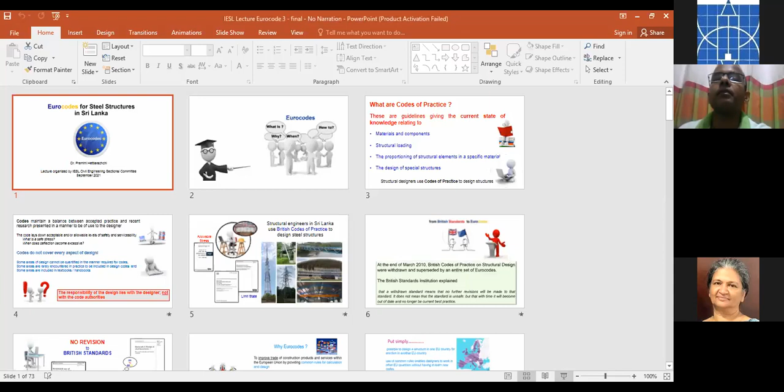So, Eurocodes for steel structures in Sri Lanka. During this presentation, I hope to answer questions that you might have relating to Eurocodes.

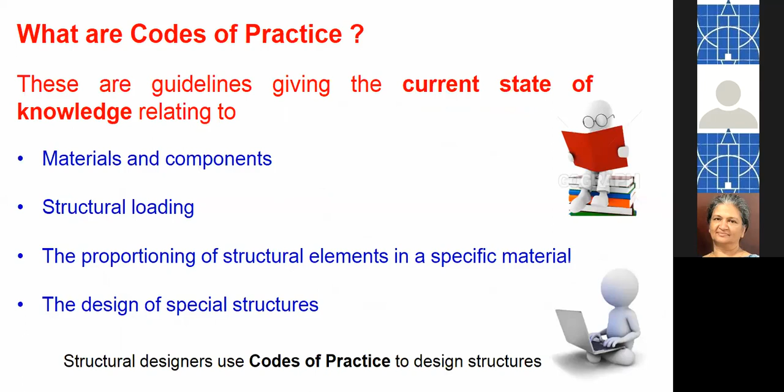Before we proceed, let's remind ourselves what codes of practice are meant to do. They are guidelines that give the current state of knowledge relating to materials and components, structural loading, the proportioning of structural elements in a specific material, and the design of special structures. Structural designers use codes of practice to design structures.

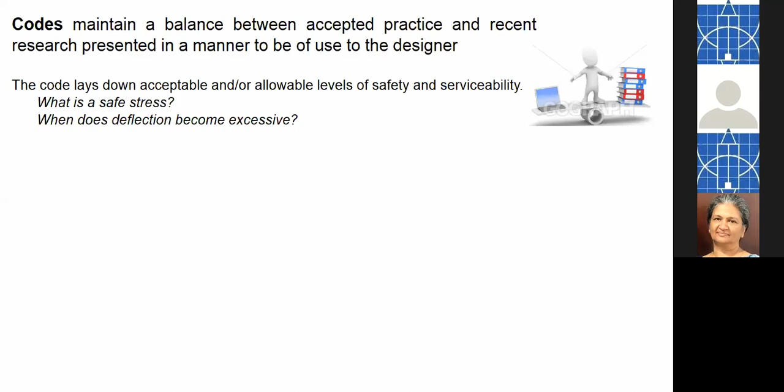Now, the codes maintain a balance between accepted practice and recent research. The code writers distill the recent research in a manner that can be of use to the designer. But codes don't cover every aspect of design. Some areas of design cannot be quantified in the manner required for codes. Some areas are rarely encountered in practice to be included in design codes, and some areas are included in textbooks and handbooks, so they don't include that in codes of practice. But the bottom line is that the responsibility of the design lies with the designer and not with the code authorities.

So structural engineers in Sri Lanka use British codes of practice, or have been using British codes of practice over the years, to design steel structures. I remember when I was a student, we were taught BS 449, which was based on the allowable stress method. And when I began my teaching career, the limit state design codes had made their appearance in the world, and BS 5950 was introduced to this country. We have continued to use BS 5950 with a couple of revisions to the code.

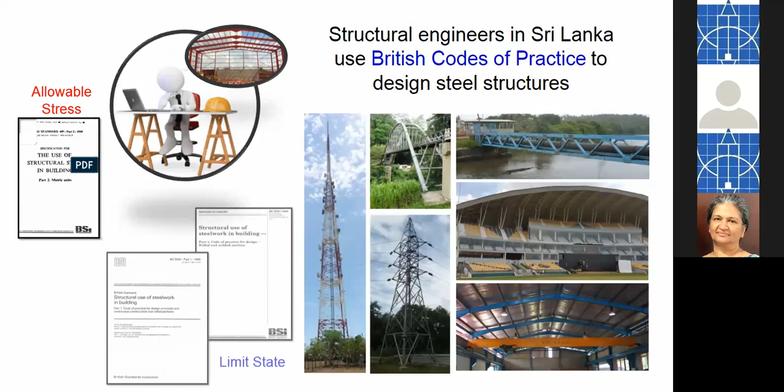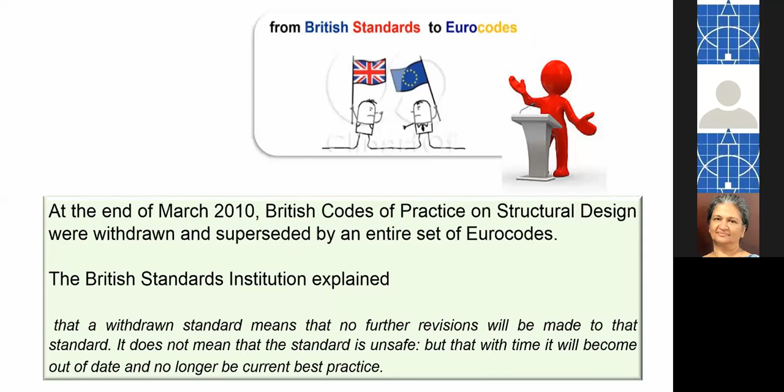So BS codes have now moved to Eurocodes. Let's see why, or what happened there. At the end of March 2010, British codes of practice were withdrawn and superseded by an entire set of Eurocodes, and no further revisions will be made to that standard. It doesn't mean that the standard is not safe, but it means that with time, it will become out of date and no longer be current best practice.

So there are no further revisions to British standards. Instead, what they have done is adopt the Eurocode and move from a BS to what is called a BS-EN, EN standing for Euro Norm. So what you have is BS-EN 1993, which is the steel code. Why Eurocodes? It's to improve trade of construction products and services within the European Union by providing common rules for calculation and design.

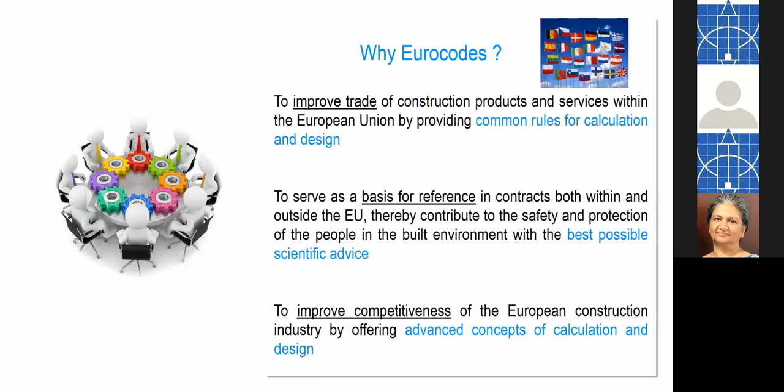It also serves as a basis for reference, giving the best possible scientific advice, and it improves competitiveness of the European construction industry by offering advanced concepts of calculation and design. Put simply, it's possible to design a structure in one EU country for erection in another country. The use of common rules enables designers to work in other European countries without having to learn new codes. That's a big advantage. And the most important advantage is that all research carried out in the European Union countries can be combined into one set of design requirements. So in a nutshell, it's a common basis for technical and scientific collaboration.

So what is in it for us here in Sri Lanka? I believe it's a complete set of up-to-date design standards that include the main construction materials, fields of structural engineering, and a wide range of structures, while at the same time retaining the flexibility of meeting local needs.

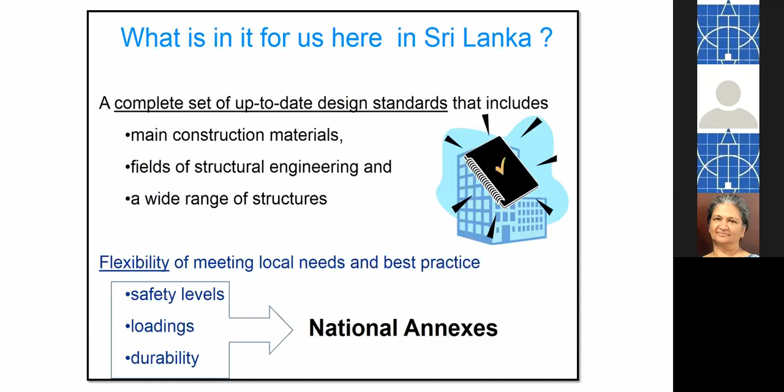And best practices with regard to levels of safety, loading, and durability in the form of national annexes. So what does a national annex include? Firstly, the nationally determined parameters, also referred to as NDP, that can be adopted in the relevant country. There are certain parameters that Eurocode says you decide for yourself what you want to use in your country. Secondly, guidance on the use of informative annexes - there are annexes to the Eurocode, and guidance in your national annex tells you how to use it. And there's also reference to complementary or supplementary information, of a non-contradictory nature, that can help the designer apply the Eurocodes. So these three aspects are included in the country's national annex.

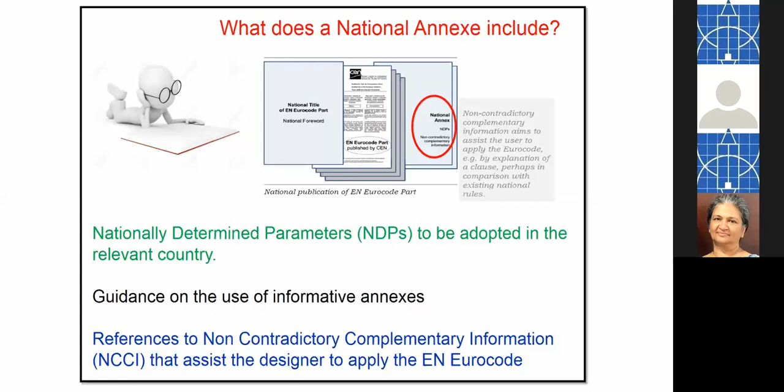Now, what is the implication of the withdrawal of the BS codes for structural designers in this country? Do we develop our own suite of Sri Lankan national codes, or do we adopt the Eurocodes? Developing a national code requires a great deal of time, effort, and resources, which we can ill afford as a developing nation. So very prudently, very wisely, the Sri Lanka Standards Institution decided to adopt the Eurocodes, and they have drawn up the relevant national annexes. In particular, I am aware that the steel structures national annex is ready.

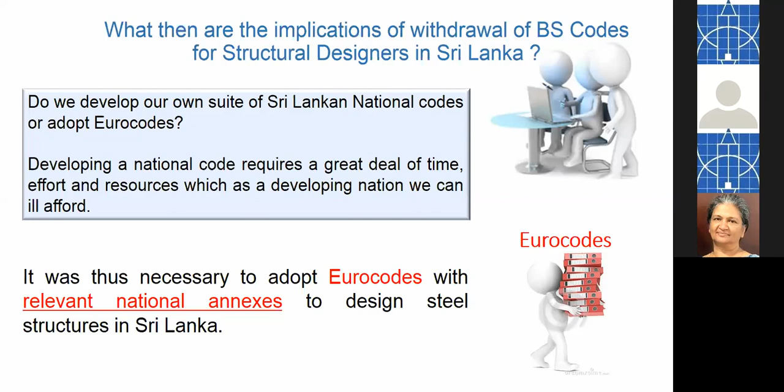National annexes have been prepared. Training has been provided - we have run short courses, but for the past 5 years or so we are training our undergraduates at Moratuwa. Moratuwa followed the other universities, Peradeniya and Ruhuna, which started before us. So undergraduates are now learning the Eurocodes, not the BS codes. Even the postgrads are being taught the steel Eurocode. There's computer software available, and plenty of guidance in the form of textbooks and specialized publications.

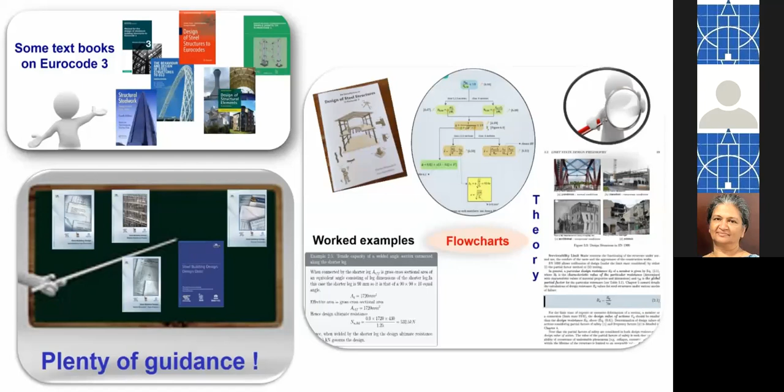I'm taking this opportunity to also refer to a textbook that I have written jointly with Isuru Nanayakkara, which gives the background, the theory, worked examples, and some helpful flow charts. It's an inexpensive, introductory level text for anybody interested in learning further details of the Eurocodes. Obviously, I'm not going to be able to explain the use of Eurocodes for steel during this short period, but there is plenty of guidance available, even on websites.

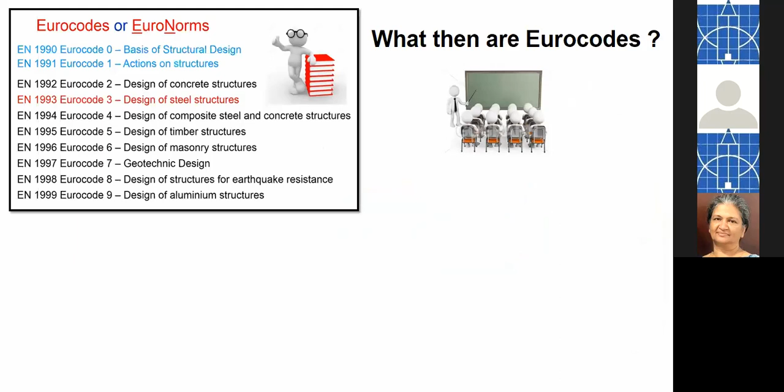So what then are Eurocodes? Eurocodes are a suite of 10 main documents. There are 2 documents that deal with basis of design and actions, and then there are 6 that are material related. And also there's 2 more - the geotechnical design code, which is Eurocode 7, and the one that deals with earthquakes or seismic actions. So you can see the link between the Eurocodes.

Now, EN 1990, which is the basis of structural design, first published in 2002, is a world's first because it's a material independent design code. Up to that point, all design codes were related to some material or another. But here is a code which has been written with no particular material. It's a core document that gives the principles and requirements that relate to safety, serviceability, durability, and robustness for designing buildings, bridges, and towers.

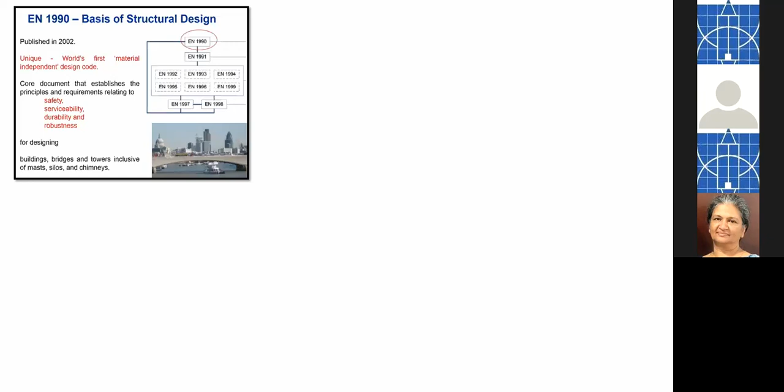When you say towers, it includes masts, silos, chimneys, so whatever. Now, the basic requirements have what they call principle rules and application rules. In the case of principle rules, you have to stick to those rules, you can't make any changes. But in the case of application rules, you can use some other method as long as you can justify that the requirement is met.

Take, for example, potential damage shall be avoided or limited by appropriate choice of one or more of the following. One of the items says, select a structural form and design that can survive adequately the accidental removal of an individual member or limited part of the structure, or the occurrence of acceptable localized damage. And that's exactly what happened.

On the right, there is this little picture, photograph of Charles de Gaulle Airport in France, where part of the terminal building collapsed. But the damage was limited or confined to this restricted length of building, and that was since repaired, obviously, and the terminal building could be used without further delay. So that is an example of where the structural form was able to cope with this damage, which was contained within a particular location.

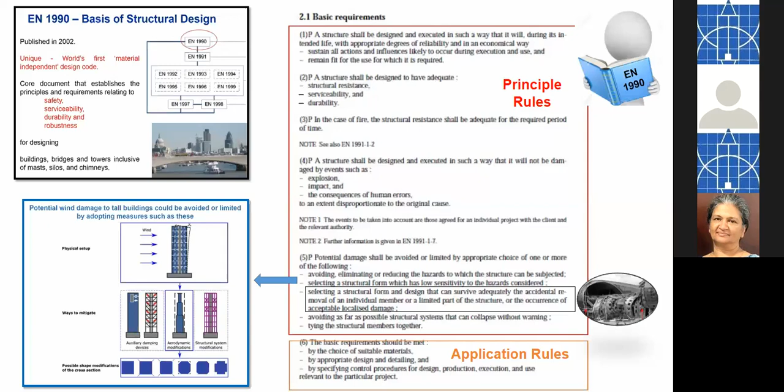Then we say here, avoiding, eliminating, or reducing the hazards to which the structure can be subjected by selecting a structural form which has low sensitivity to the hazard considered. And if you take that of wind and you have tall buildings, you as structural engineers in the audience would know that there are ways that you can mitigate the effect of this wind on tall buildings.

Then this code, this EN 1990, the code document, gives you the categories of design working life, and they give you different examples. So monumental structures, iconic structures is about 100 years.

Now this is something as an example of a nationally determined parameter. So we in Sri Lanka can decide to change this if we wish to, right? In the UK, they have done this. The 100 years has been extended to 120 years in the case of monumental structures.

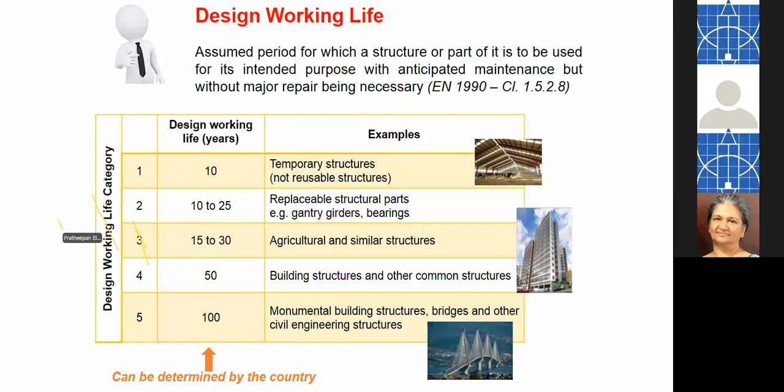The ultimate limit state and the serviceability limit state are the same limit states. Eurocode sticks with the same limit states. Now, some of the terms they use are different.

So they don't refer to loads, they call them actions. So you don't have dead loads, but you have permanent actions. Then all of your imposed loads, wind loads, snow loads, they are referred to as variable actions. They can vary over time, space, whatever. And then they have accidental actions. So variable actions can be subdivided into imposed actions, those due to people, furniture, storage, and there is the wind and the snow. So these are the actions on the structure.

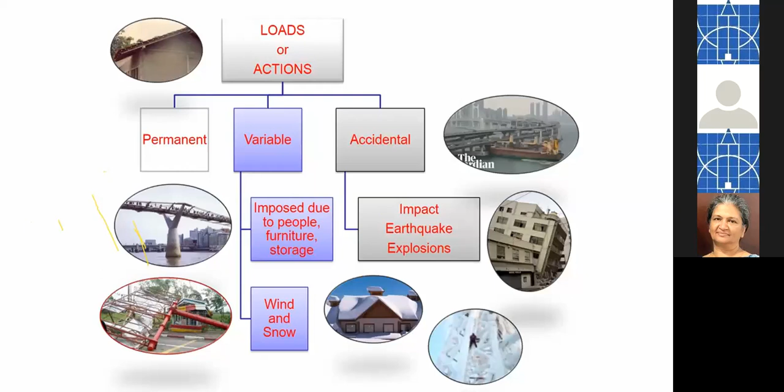The philosophy of structural design obviously remains the same, and it means that the design action, which is the characteristic action enhanced by a factor of safety, has to be less than the design resistance, which is the characteristic resistance divided by a partial safety factor, that for materials. So the concept or the principles of structural design are the same. But only thing is these numbers, these gamma F and gamma M and so on, are now a little different from what we perhaps have been or what we are familiar with.

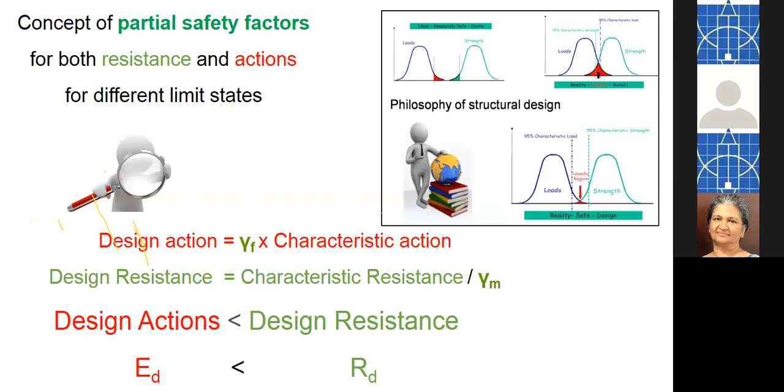So firstly, how do we combine actions? So you have your permanent action, as the name suggests, it's permanent, and you combine that with variable actions. The photograph that I have shown you is the Gateshead Millennium Bridge in the UK. And it shows you the bridge with no people on it, and then with so many pedestrians on the bridge. So how do we combine this?

Now, EN 1990 gives you two methods. This is the code document still that we are talking about, right? And the two equations are, you have 610, which is the fundamental equation. And then you have another pair of equations, 610A and 610B, and you have to select the more onerous of the two, the worst condition of those two equations. Alternative expressions - you can use either 610, or you use 610A and 610B and take the worst condition. It's not that you have to do all three. So it's only 610, or 610A and 610B.

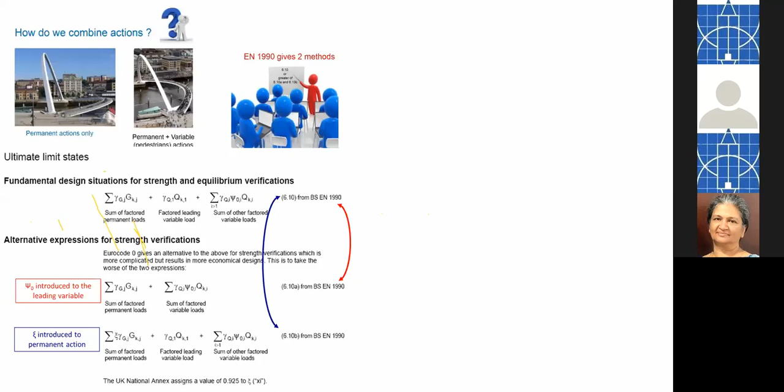So let us look at these partial safety factors. I will explain this - the equations look rather frightening, I must admit, but they are not as bad as they initially seem to be. So if you take this actual small print there, but I gave you the entire page that is in an annex to EN 1990.

So it says that the gamma G value, the partial safety factor applied to permanent actions, is 1.35 at its maximum and 1 at its minimum. And gamma Q is 1.5, the partial safety factor for variable actions, and is 0 at its minimum. So you can see they have clipped those numbers we are familiar with. We had 1.4 GK and 1.6 QK in BS, right? So now 1.4 has reduced to 1.35 and 1.6 has come down to 1.5.

Then on top of that, there is another term they have introduced called the psi factor, called the combination factor. I'll talk about that a little later. And there is another one introduced to the permanent action. Again, we can decide it's a nationally determined parameter. 0.85 is what the European code recommends, but in the UK they have increased it to 0.925.

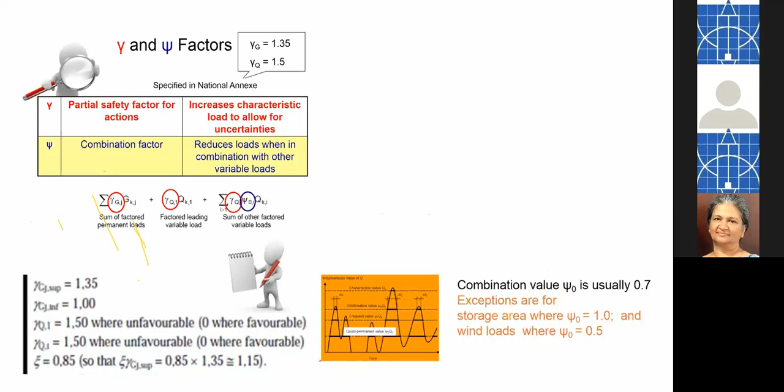So when we talk of the partial safety factors, we have 1.35 and 1.5, right? The combination factor is introduced to reduce the load when it's in combination with other variable loads, and that value is usually 0.7. The exceptions are for a storage area, where this load can be anticipated to have its maximum value throughout its life, so you take that as 1. And in the case of wind, you take this combination factor as 0.5.

So what the code in effect is doing is, when you look at equation 610, it's taking the sum of factored permanent actions, and then taking one of the variable loads at a time, the factored leading variable load, multiplied by that 1.5 factor. But the other variable action, say wind or snow or whatever, you use a combination factor. It's the same effect as if you remember we had 1.2 GK, 1.2 QK, and 1.2 WK. Same story, but put in a more consistent fashion.

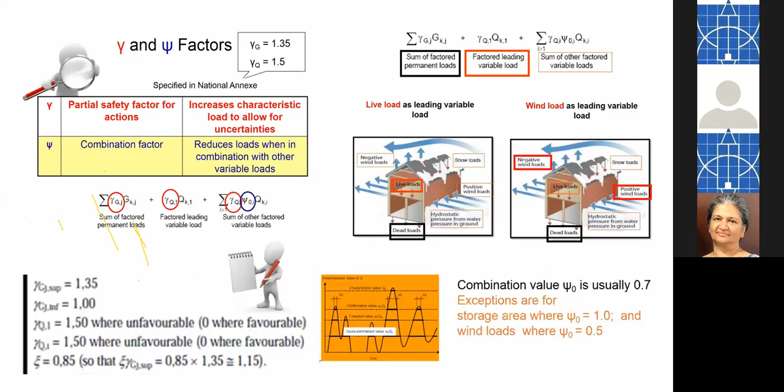You will understand under simple examples. So on this one I just have a floor beam, and I have 1.35 into 10 plus 1.5 into 12. 10 is my dead load or permanent action, and 12 is my imposed action. So 1.35 into 10 plus 1.5 into 12 gives me 31.5. So very simply, the design action is 31.5, right?

But if I were to use 610A and 610B, what I am now doing is introducing this combination factor into the imposed load. That reduces to 26.1, but you can't get away with 26.1 — you have got to use 610B, and we find that gives you 30.5. In 610B the leading variable action is taken to its maximum, but on the permanent action they're reducing it marginally, and in the UK they're using 0.925. So there is a marginal decrease by using 610A and 610B. So extra effort, but what you're getting out of it is hardly worth it, and I would stick to 610 if you were to ask me.

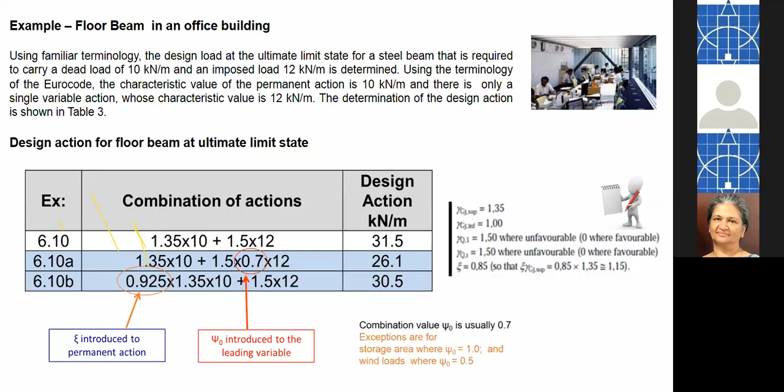Now, what is interesting is when you have wind also contributing. Let us take a steel roof truss, where a particular member, due to permanent actions only, carries 4 kilonewtons in tension. Due to imposed loads, such as people working on the roof or repair, let us say it's subject to 2 kilonewtons in tension. And due to wind, also in tension, there'll be 3 kilonewtons.

So when you combine this, you have to take the leading variable action. In the first instance I'm taking the live load as the leading variable action, and reducing wind by a factor of 0.5. So I have an answer of 10.65. Next, you take wind as the maximum: 1.5 times 3, and 1.5 times 0.7 as the combination factor for live load, and I end up with 12. So obviously my design action would be governed by wind more than the live load, and I have a design action of 12 kilonewtons, right?

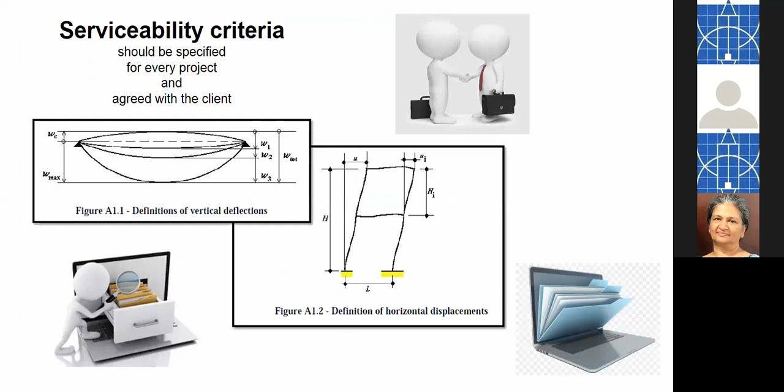Then we move on to the second Eurocode that we need to use, which is that to do with the loadings, or in Euro speak, actions. There are 4 different codes that deal with actions: general actions, traffic load on bridges, cranes and machinery, and a fourth one for silos and tanks.

Now that first one, general actions, is again subdivided into 7 parts. The first one is the one we should become most familiar with, which gives you the weights of all construction materials, densities, self-weight, and so on, as well as the imposed loads. Part 2 deals with fire.

Part 3 deals with snow, not a problem in this country. But the next one, part 4, is of great importance - that's the one that deals with wind. So when you're designing a structure, we would need EN 1991-1-1, as well as 1-4.

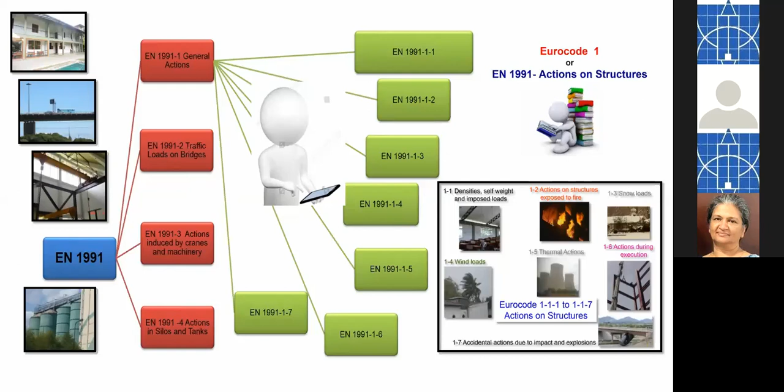Then there's thermal actions, actions during execution - that is construction, they use the word execute for construct - and accidental actions. So there are these 7 parts of the actions code that we need to be aware of.

So if I just have a quick peep at EN 1991-1-1, this has all the densities and self-weights of construction work, as well as the imposed loads specified for different categories of buildings. So if you have a residential or domestic building, you have office areas, then you have areas where people congregate, shopping areas, and also storage areas.

E is for storage. Category C is again divided depending on the gathering of people. So you might have something like a restaurant. On the other hand, you might have a place like a stadium where there's a much greater number.

Now we move on to the steel code itself. I have deliberately selected an icon which shows you many, many volumes, because that is really what the steel code is like. You have a whole number - I think it's almost 60 or 58 documents if you were to count it all up.

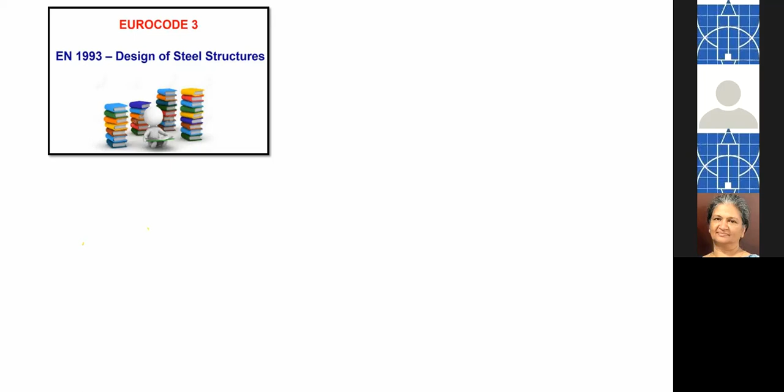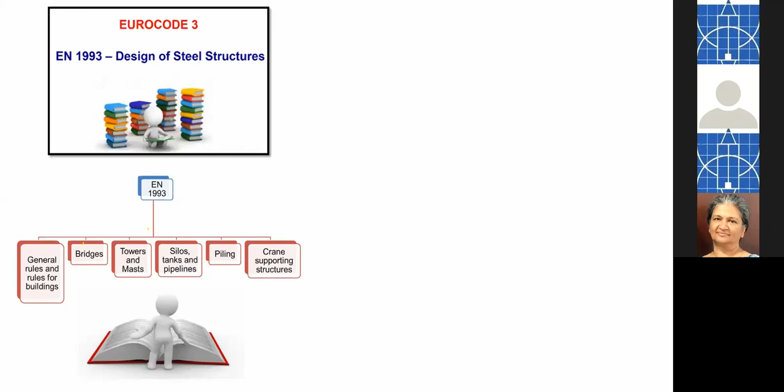Right, so it is subdivided into 6 parts. Part 1 is what we are mostly concerned about, which is the general rules and rules for buildings. Then there's another section which deals with bridges, a third to do with towers and masts, silos, tanks and pipelines in yet another, piling, and then crane supporting structures.

Now, the first part is again divided into 12 parts. And of those 12, the steel code that we are most familiar with would be 1-1, which is the general rules, and also part 1-8, where joints and connections are dealt with separately.

It's a separate document. So in order to design a steel structure, we need to design its members, and we need to connect those members together. So we essentially would need to look at 1-1 and 1-8, but depending on your structure, you might need to refer to the other documents as well.

So fire, for example, is in 1-2. Plated structural elements like a plate girder, if you were to design say a bridge girder, you have to use 1-5. Fatigue is a problem, then you have to look at 1-9, and so on. There are these other parts, 12 such parts, which all contribute to these general rules. But you don't need all of them for a very basic structure—you can get away by using 1-1 and 1-8.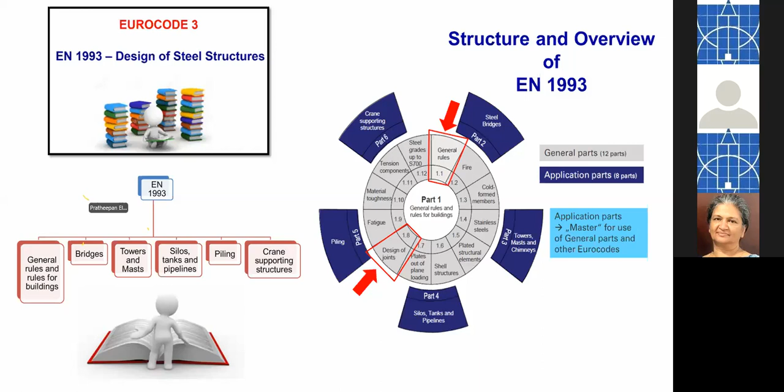If I have a quick glance at the contents, we have the general basis of design, materials, durability, structural analysis, and then the two limit states: ultimate limit state and serviceability limit state. Now there are certain parts of this that I would like to highlight or draw your attention to, and I will describe that in greater detail in the slides to come.

Then section properties—the terms they use are also a little different. For example, section modulus, they use the word W. Elastic section modulus is Wel, and plastic section modulus is Wpl. So there are small changes that we have to get accustomed to. Axial forces are denoted as N, bending moments by the symbol M, and shear forces by the symbol V.

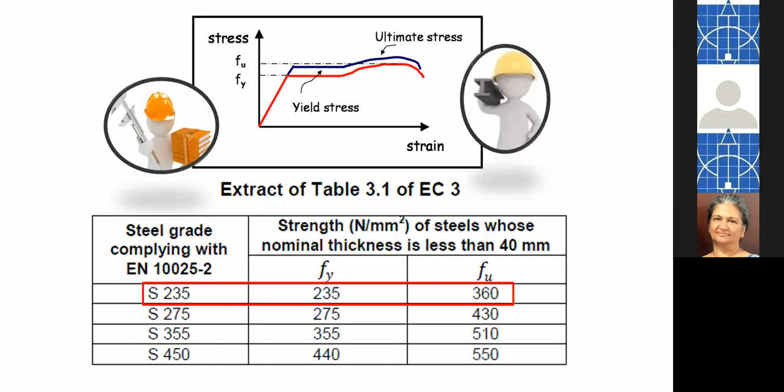So as long as it complies with the specification, the Euro norm 10025, we can use S235, or continue our calculations using the corresponding strengths of S235 as opposed to S275. So if a steel does not meet the specifications of S275, but meets 235, we don't need to reject that steel—we can still use it, but at a lower strength as given here. That I feel is one advantage of the Eurocode, which we didn't have in BS 5950.

But certain structures might be rather slender—they might be subject to sway action and so on, and those give rise to secondary effects. So those deformations are not small enough to be ignored, and then we have to do what is called a second order analysis. More complicated, but it correctly simulates or represents what's happening to that structure. So you can have either a first order elastic analysis or a second order analysis with relation to geometry.

When you talk about the material, fortunately steel is a linear elastic material up to a point, and then it yields. So then we look at the plastic hinge causing it to collapse. We can either use elastic analysis, linear elastic analysis, or we can go for a plastic analysis. So you can see that there are 4 possible combinations that we can use in our analysis of the structure.

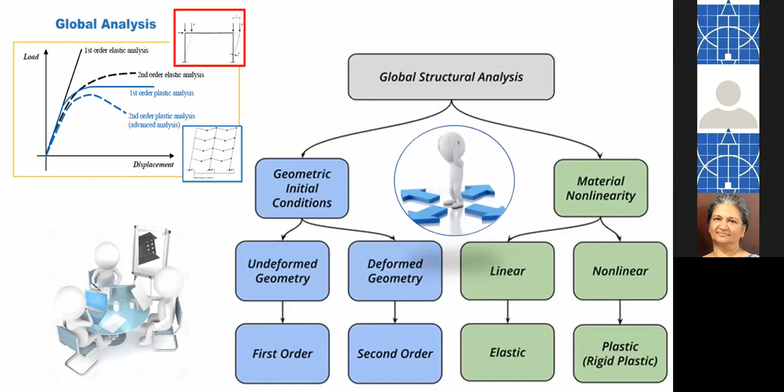Again, the code guides you on whether you should be using a first order analysis, or alerts you to the fact that beyond this you should not be using a first order analysis. So you have either got to change the stiffness of your structure, or you have to look at the secondary effects—what we call the P-big-delta effects and the P-little-delta effects. So they are considerable, and therefore you would need to carry out what is called a second order analysis.

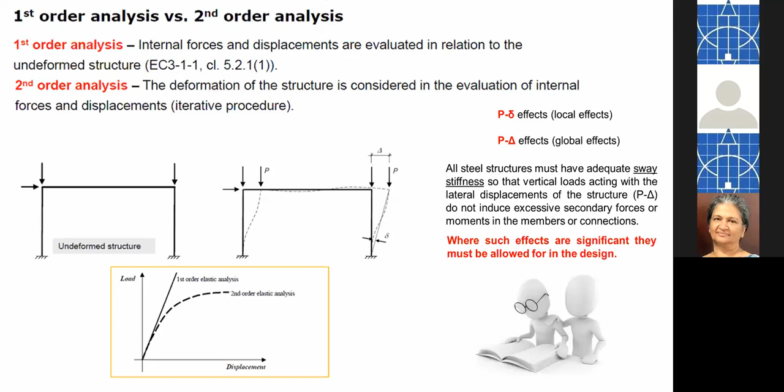So this is very informative in that sense. Then we have this question of local buckling. That is because steel sections are made up of very thin sections - I'm not talking of cold formed sections, even your hot rolled sections. Those plates, when subject to compression, could buckle, plate buckling. So this problem of local buckling taking place before the section fails in another way, either in bending or compression or whatever, there will be localized crumpling or plate buckling.

So we have to classify a section depending on whether it is, in the BS terminology, plastic, compact, semi-compact, or slender. In the Eurocode, they refer to these as class 1, 2, 3, and 4, with class 4 corresponding to the slender section. Again, it's very similar to the BS - they give you the limits within which you have to work if it is a non-slender section.

Now this is a very important factor, the partial safety factors for steel. They have introduced 3 different partial safety factors: Gamma M0, which deals with the yielding aspect; gamma M1, which deals with the instability aspect; and gamma M2, which deals with fracture or rupture. Gamma M2 is 1.25 as recommended in the Eurocode, whereas gamma M0 and gamma M1 are not as dangerous, so they are taken as 1 or the actual value. The UK National Annex uses 1 obviously, and in the case of fracture, they bring it down from 1.25 to 1.1.

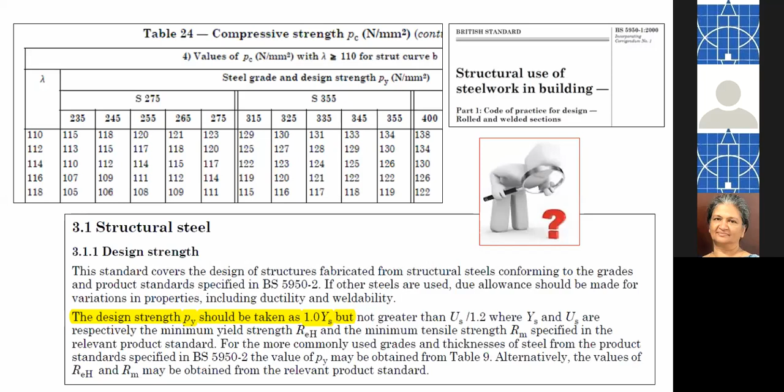But when you have steel which is perhaps not of that same quality, or you're not sure of the quality of your steel, there's a greater spread of results. Are we happy to use this partial safety factor of 1? I'm not sure what you did as practicing engineers, but I used to alert you when I was teaching BS 5950 to students at Moratuwa. Now I can be happy because now you have a value of 1.25, so that looks after any discrepancies in quality. So one strength divided by 1.25 means you're actually multiplying it by 0.8 - you're taking 0.8 of its ultimate strength.

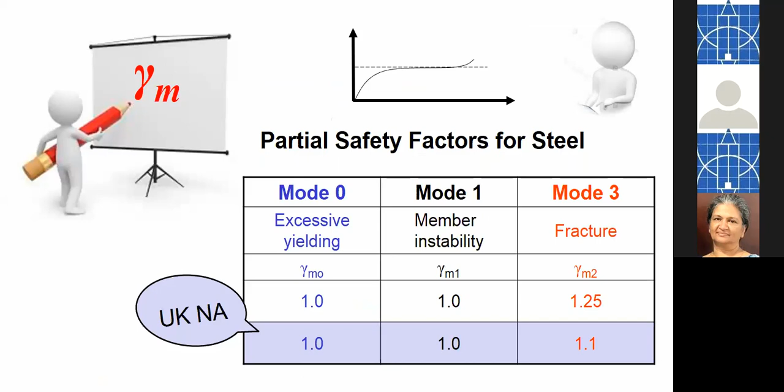There's also more focus on formulae rather than on tables and charts. In the British codes of practice, or older codes, before we had spreadsheets and computer software, we had all these tables and charts that designers used to look up to do their designs. Today we don't need to do that because we have software or spreadsheets - computational facilities are available, so we can use equations, and most of the later codes actually include the equations as well, and this is what Eurocode has done as well.

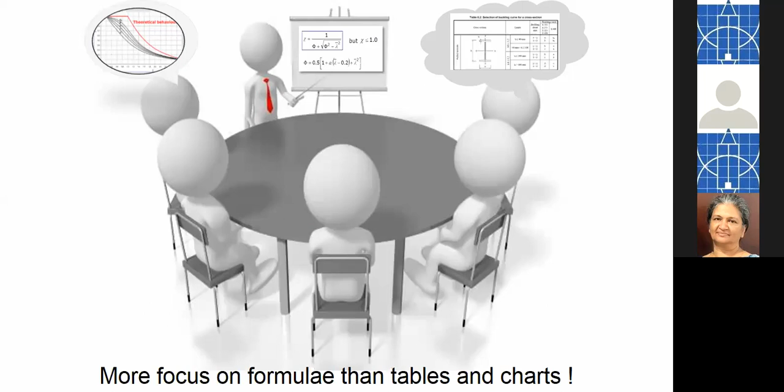And so there is an explicit reference to the partial safety factor. These partial safety factors are nationally determined parameters as well, and we are going with the European recommendations. Most of our other recommendations, we stick with the British because that has been our practice before, but in the case of the partial safety factor, we remain with the recommendation given in the European Code of Practice.

Now, EN 1993 1-1, that is the steel code, is based on structural behavior. So there is one section that deals with all the resistance aspects - whether it's bending, tension, compression, or shear, all the resistance parts are given together. And stability is dealt with in a separate section, so buckling, lateral torsional buckling, and so on are dealt with separately. So there is more responsibility now on the designer to identify the correct mode of behavior.

Unlike in BS 5950, you had a recipe book style - okay, if it's a beam, do this, do this, do this; if it's in compression, do this, do this, do this. So this is an essential difference between BS 5950 and the European code. The Eurocode EC3 is the one that deals with steel, so it's also called EN 1993 or Eurocode 3.

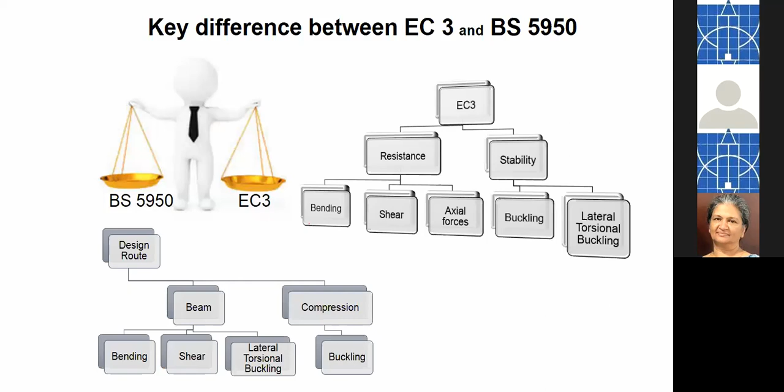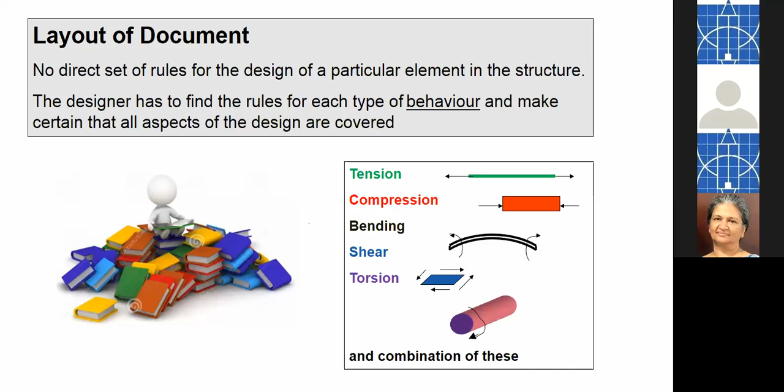The layout of the document is such that there is no direct set of rules for the design. You have to find the rules for each type of behavior and make certain that all aspects of the design are covered. So if it's tension, you have to find out how this will fail in tension. If it's compression, how will it fail in compression? If it's bending, shear, torsion, whatever, you have to find out how it fails, and then look for those particular rules within the code. It's all there, but not given in a flow chart form. Let me take you very quickly through these different behaviors, but not in great detail.

If you take tension members, they are the simplest to design. You must make sure that there's enough area and enough strength. In the case of steel, it yields, it elongates with no additional stress in it. So there are two aspects: it can yield too much, or it can fracture, due to the presence of bolt holes. So there are two checks you need to do, and take the smaller of the two. It's very straightforward. If you know what you're doing, you can design a steel tension member.

You have the area, you have the yield strength, you know the grade of steel, divide by gamma m naught, and you have the plastic resistance. Or you might have a very vulnerable section at the bolt holes. So you take the net area at the bolt holes, but not even that — you take 90% of that into the ultimate strength, divided by gamma m2, where gamma m2 is now 1.25.

Angle sections are dealt with separately, and for that you have to refer to the joints code, EN 1993-1-8. Angle sections subject to tension are dealt with separately because of the eccentricity of the load — there is an inherent eccentricity because the connection does not coincide with the centroid. So we have an easy way out, and that is dealt with separately in another document.

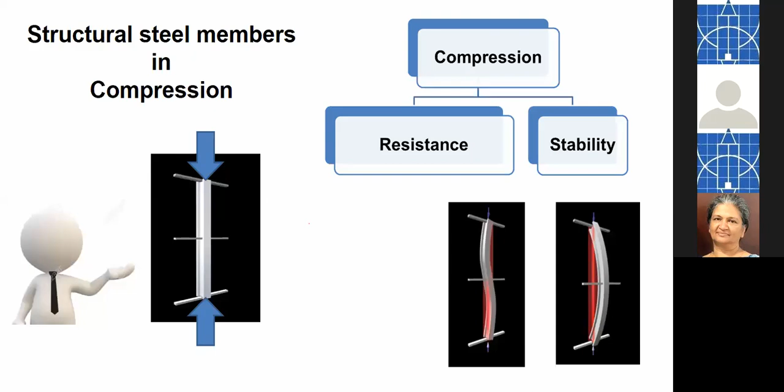When it comes to compression, there is the resistance aspect and the stability aspect. Again, we have to go through the stability part of it, and it's very neatly put. Compression resistance is the area multiplied by the yield strength, Fy upon gamma m naught. The buckling resistance is that same value, but now reduced by a certain factor. And we know that buckling depends on the slenderness of the section.

If you look at the Euler buckling curve, the bottom curve here, this curve will tend to infinity mathematically. As the slenderness gets less and less, the carrying capacity keeps increasing. But it's curtailed, limited by the fact that it will crush before that happens. So that value where the crushing and buckling load are the same is referred to as slenderness lambda 1. We introduce the non-dimensional slenderness — the actual geometrical slenderness of your section divided by this lambda 1. So this curve is drawn where the non-dimensional slenderness value is 1.

Why do we have separate curves here? Because the Euler buckling curve is a theoretical curve — it doesn't take into consideration the real behavior due to imperfections and so on. So we have to cater for those, and that is where we look into the axis about which it will buckle, the type of section, and so on. There are 4 different curves introduced. I'm showing you the curves here, and the curve is included in the Eurocode, but they have also given you the equations that lead to these curves, so you can use those equations and come up with more precise values than just reading off the curve.

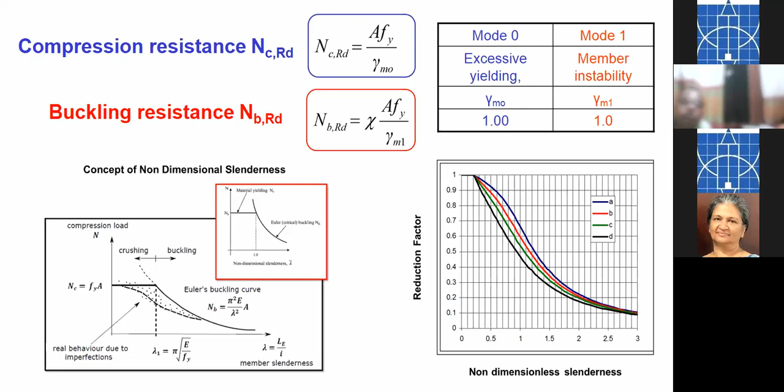But one thing the Eurocode has not included is, in determining the slenderness, it does not give you the effective length values. If you recall, if your two ends are fixed, the effective length is the actual — 0.7 times the actual length. The Eurocode does not include that; you have to look for it elsewhere. If you're an experienced designer, it comes to you. If not, you have to look into a handbook or textbook or some sort of guidance to find out what the effective length should be for your particular end conditions.

When it comes to a beam, again the code talks about resistance and stability. The resistance covers bending, shear, and bending and shear combined.

And then we have the stability, the lateral torsional buckling. So there are 3 different ways this beam can fail. But there are actually 6 different ways a steel beam can fail, right? So what can go wrong?

Firstly, you can have local buckling in compression. That is what is shown at the top. You have a few wrinkles at the top, so it can fail in local buckling. It's not listed here, but that is one of the forms of failure.

Then there is bending failure, shear failure, and lateral torsional buckling, again because of compression. I'll explain that in greater detail later. Then there is also bearing or web crippling failure, because when the load comes right through the web, which is a slender, thin section, that can cause buckling or it can cause crushing. So that's a problem.

And you have excessive deflection, which is a serviceability limit check. The code doesn't take you through this. You have to identify how the beam fails, and look for it in the code. So that's what I'm trying to impress upon you.

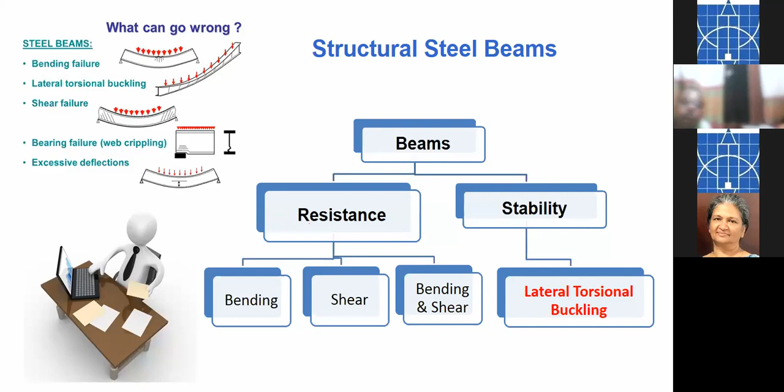When it comes to the resistance checks, the local buckling check and the bending resistance are combined by first categorizing it into class 1, 2, 3, or 4, and then using the appropriate formula for it. So if it's class 3, that means it can't become plastic. Between that elastic region and the plastic region, the section has buckled locally.

Right, so then you would use only the elastic section modulus in working out your bending resistance. When it comes to shear resistance, it's virtually the same thing that BS 5950 was using. After all, steel behaves in the same fashion. It's just that we learn a little more about it and try to include what we know about it in a fashion that is easier to absorb, or more of a realistic nature. We represent it in a more realistic fashion.

So if you remember your equation for shear resistance, it was 0.6 py times the shear area. Now 0.6 py is the design shear strength of the steel. Here, instead of 0.6 py, we use Fy upon root 3. And anyone who does that arithmetic will find that comes to 0.58, which is near enough to 0.6, right? And of course, gamma m naught is 1.

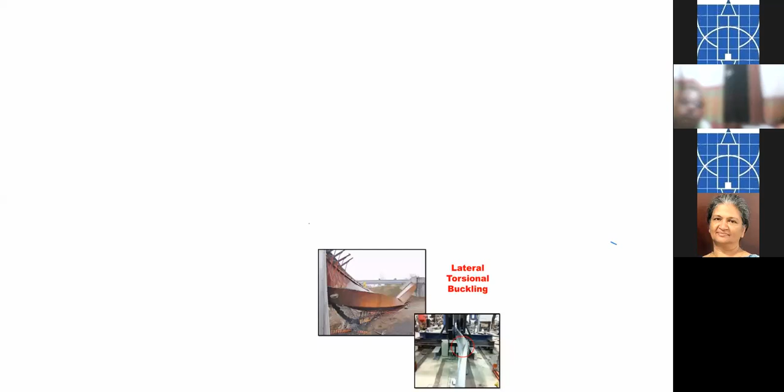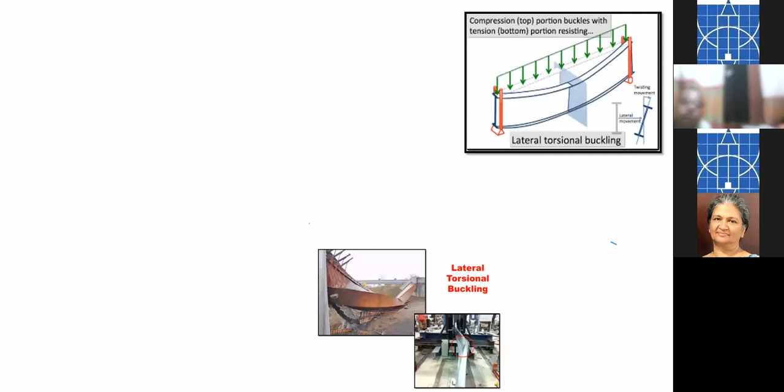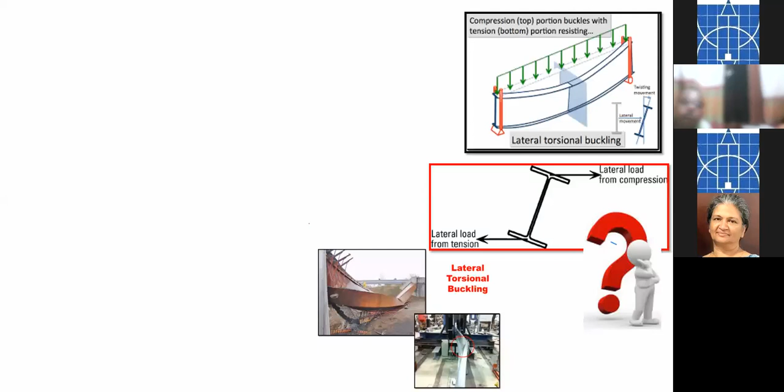Then this question of lateral torsional buckling. Lateral torsional buckling occurs because there is compression in one part of your beam, and tension in the other part. So the compression part wants to buckle. The tension part says no, I want to remain straight. So there is this twisting action, right? The lateral load from the compression and the lateral load from the tension cause this twisting action. And that phenomena is called lateral torsional buckling.

And it is dealt with in the same fashion as buckling in compression. So you have a similar set of equations from which you can derive what is called the buckling resistance moment, right? So they are very consistent in that. They have the same sort of formulae to work out these details.

Then there is the web buckling and bearing that I spoke about earlier, and that's more common in very deep sections, so that's plate girders. So they have included that under the plate girder section. That only happens if you have a load which is transferred via the flange to the beam, right?

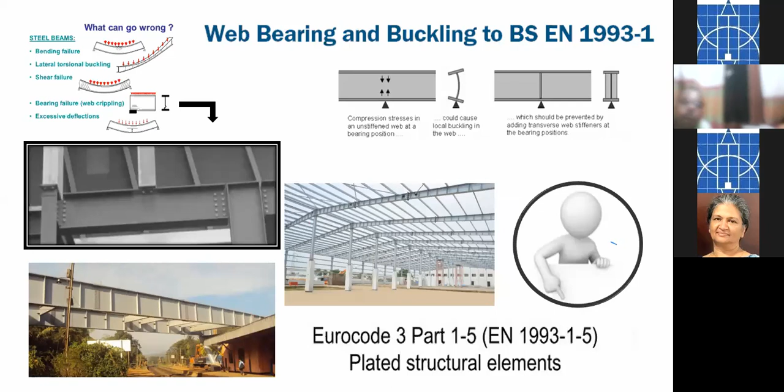So you can have a column stopping off like in this photograph here, or it could be where the beam is sitting on something else, supported on something else. But if you just have a secondary beam meeting the column through the entire web, then of course the web doesn't buckle, right?

So you've got to look at the appropriate code of practice for that. In the case of deflection, there is no guidance given, and the UK National Annex goes back to their original values. Where the finish is brittle, the limit is span upon 360; for all other beams, span upon 200. Brittle finish has a more stringent limit, and for cantilevers, you use a limit of span upon 180.

This is what the UK National Annex recommends. I don't quite recall what we recommended in the Sri Lankan National Annex, but you can decide on it on a case-by-case basis. If there is no guidance, you can decide to use these as your guidance.

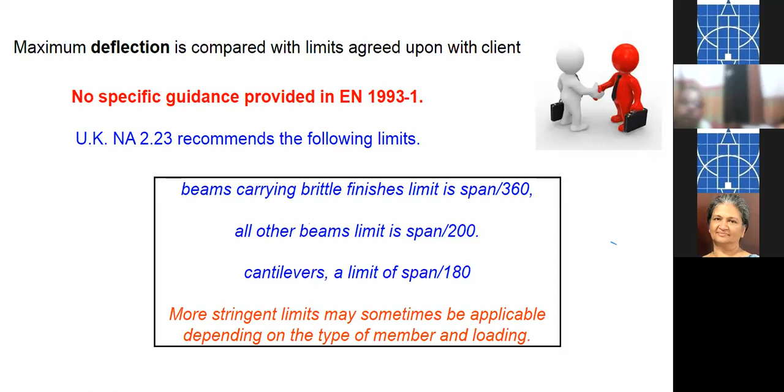Then combined bending and axial forces - that's a bit of a tedious calculation, but they take you step by step. So sometimes at first glance, these equations look rather frightening, but if you digest it little by little, it's actually not as bad as it looked at first glance.

This is from a structural blog that I was going through. There's heaps of information on the websites. It's not difficult at all, because remember, the European Union is so many countries, so all of them put their information out, and there is a plethora of information that you can gather details from.

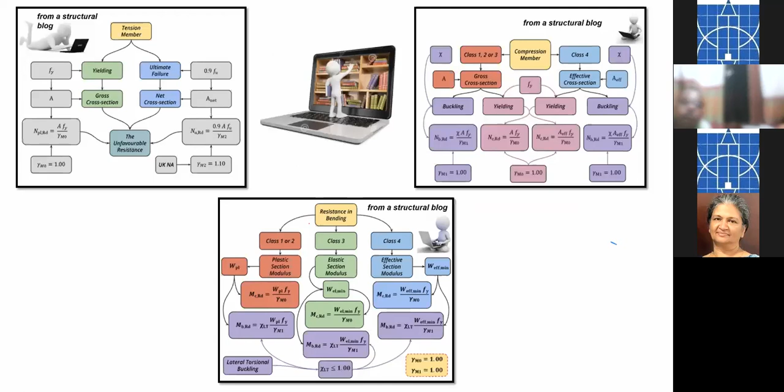These were interesting flow charts relating to tension members, compression members, and bending members. Of course, it does talk about lateral torsional buckling as such here, but yeah.

Right, now moving on from the elements to the joints. So steel structures are designed so the constituent steel member elements can safely resist the design actions, and they must also have a deformation capacity that is consistent with the assumptions made in the global analysis.

So if you assume a rigid joint means no rotation possible, you have to ensure that that rotation is not possible. So you can't have a joint like this, and then have it fail like that. So you've got to make sure that that rotational capability, or the ability not to rotate, is maintained.

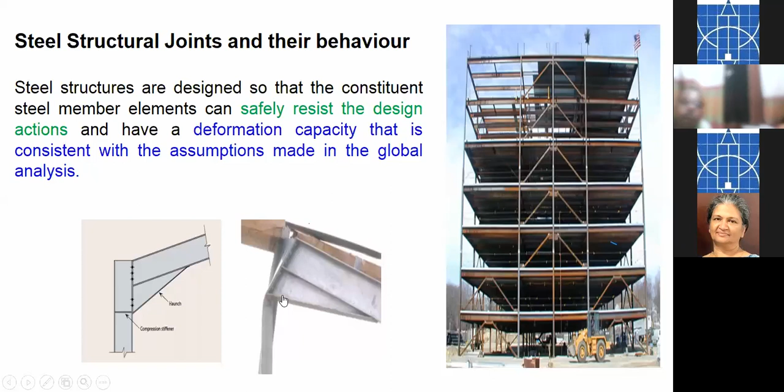Similarly, if you're talking of a roller support or a sliding joint, then give it the sliding joint, because otherwise there will be a catastrophic failure if you don't allow it to move, right? So in the case of steel, you give slotted holes.

Now, when you provide a slot, it's not just enough to provide a slot, but you must ensure that the displacement that you calculated at that support can be accommodated by this slot. So there is more to it than just analysis and looking at the maximum deflection or the maximum rotation or whatever it is - you have to ensure that all those little assumptions that you made in your analysis are now proven in your design, right?

So rotational movement allowed at a hinge - if you have said it's a hinge and you're allowing rotation, then detail your connection so that it's able to move. If it's a pinned base, then make sure that it's a pinned base, right? So those connections must satisfy the requirements of structural behavior.

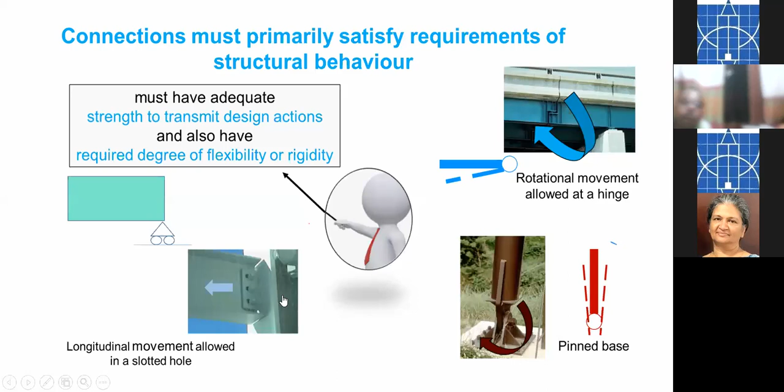So BS 5950 says something of this nature and then doesn't go beyond it. But the Eurocode, you will discover in the next few slides, goes into a lot of detail into this aspect of it. So resulting moments and forces depend not only on the deformation capacity of the individual beams and columns that make up the structure, but also on the joints between them, right?

So here we are - when you model a structure, analysis, modeling and design of joints, we are used to: there is a frame, you decide on the member sizes, you decide whether your joint is a simple joint or a continuous joint, then you go on to do your analysis and come up with your sections, check whether they are safe, and then you go to do your joint design.

And then you might discover that what you assumed originally as a simple joint is not quite a simple joint. So you have to redo this analysis and redo everything that you did, maybe several iterations of this nature. But the Eurocode gives guidance so that you don't need to go through these repetitious calculations. Now we know that a simple joint means that there is no bending moment capacity and that rotation is possible - so on a moment rotation curve, it is this green line.

Similarly, if it's a rigid joint or a continuous joint, it means there is no rotation possible, zero rotation, but it's able to carry a certain bending moment. So it's this vertical line. But in reality, neither of those exist. You might have a joint close to a simple joint, but not exactly, and similarly a continuous joint, but not really exactly continuous. So the chances are we are in this intermediate region of what we might call a semi-continuous situation.

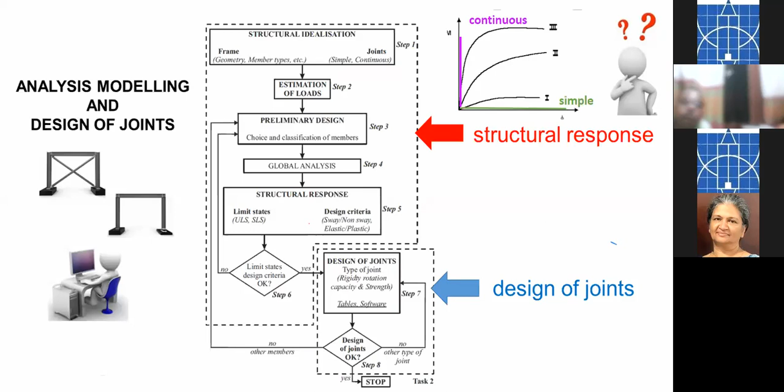Here again, the code is very specific. It helps us: it says your stiffness could be either pinned, rigid, or more likely semi-rigid. Your resistance could be full strength, partial strength, or pinned. It's only in the pinned situation that you can consider it as simple. Or if the stiffness and resistance are rigid, and it's a full strength joint, then it is continuous. Anywhere in between is a semi-continuous situation.

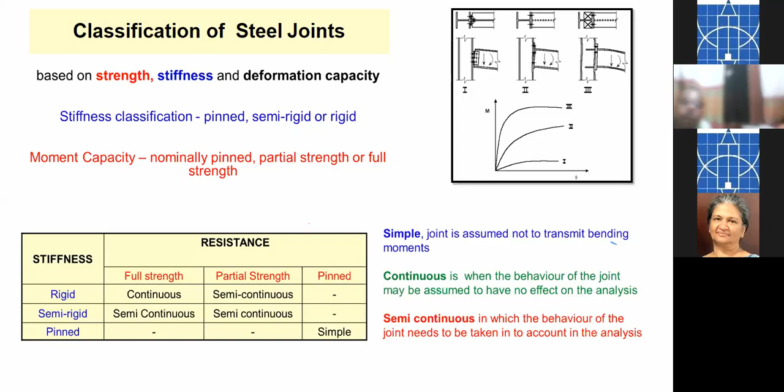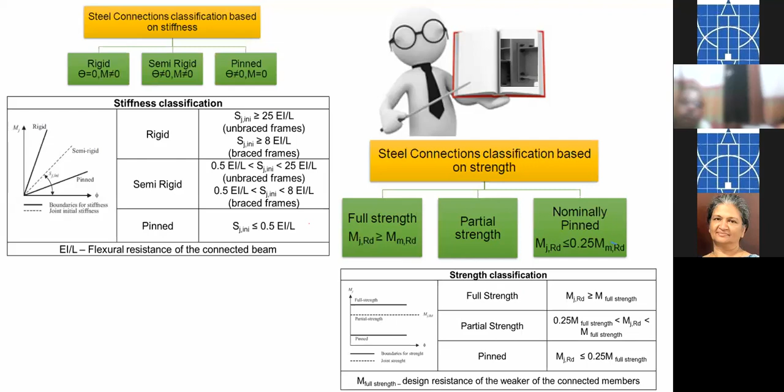So then you might say, okay, how do you work out the strength of the joint, how do you work out the stiffness of the joint? There again, the code is very helpful. But before I explain that, here we have a consistent approach to the design of steel structures. At your preliminary design stage, when you're working out section sizes and feed that into your software, you can use the stiffness, rotation capacity, and strength of your joint. You design an approximate joint and give its details so that you're modeling almost realistically the actual structure. So you might have to iterate, but not as many times as before, and your assumptions will hold good.

Eurocode 3 part 1-8 also has 7 sections. Something I'd like to draw your attention to is that they include hollow section joints, or joints made with tubular sections, which is new. BS 5950 didn't have that—you had to refer to some special document if you were designing a structure with hollow joints.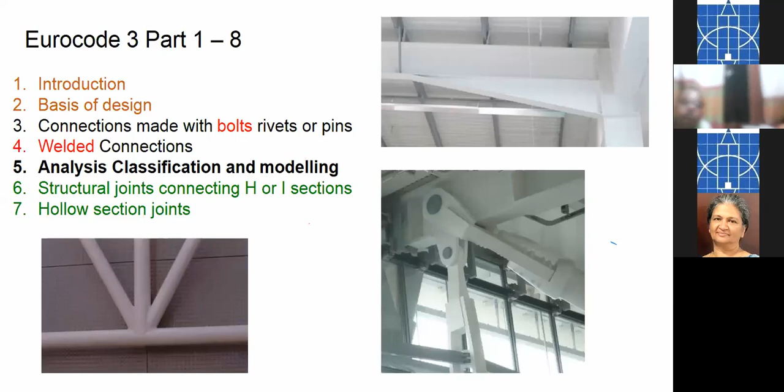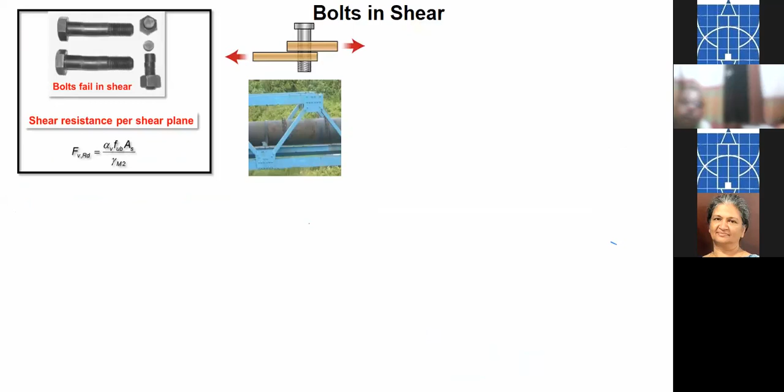That's something new. Now bolts are contained in chapter 3 and welds in chapter 4. A bolted joint in shear, when a bolt is subject to shearing action, can fail with the bolts in shear—there's a straightforward equation there. The bolts could also fail in bearing, where the bolt rests on your plate, so it can fail in bearing, or it can also tear out. The BS gave the same equations, and you check each one in turn.

Here we just include a coefficient—you take the lowest value corresponding to each of those different failure modes, and that is my alpha. Similarly, when you have a number of bolts together, they will interfere with each other, perhaps in this bearing resistance. So there is this material confinement, and a K value is introduced to take care of that. You have the bearing and shear resistance, but this is for a single bolt, so if you have a group of bolts, you multiply by the number of bolts. But there is also another aspect.

This is block shear. Block shear means that the entire group of bolts can shear out—not only shear, it will rupture as well. So there's a combination of rupture, tension, and shearing. This is something they discovered when they looked at failures in steel connections. The Eurocode has included it, and those familiar with the latest revision to BS 5950, the 2000 version, will know this was included there too. In other words, when the European experts got together, they learned from each other and included these in their own revisions so the transition stage was made smoother. So block shear is also dealt with here.

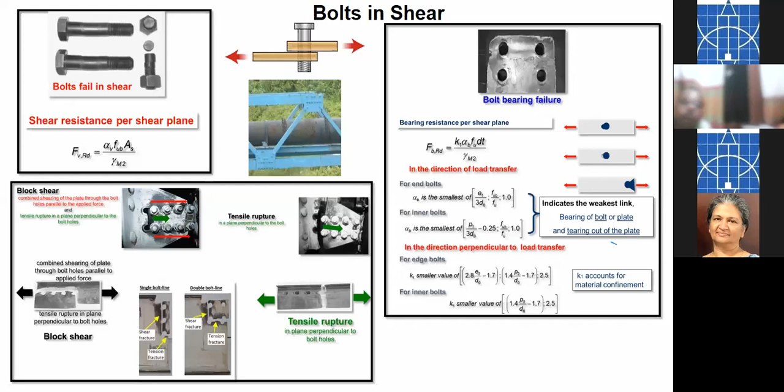Then the other thing is the tension force, that when a bolt is subject to tension, the plate itself that it's connected to could flex, could bend. This is again something which was called prying action. BS 5950 refers to it, but they don't go further. They say provided it's thick enough, the plate, then you can ignore the prying action.

So true enough, if the plate is thick, then it will be the bolts that fail. But if the plate is thin, then it could be the plate that bends and your bolts will remain as it is. But in an intermediate situation, the plate could bend and the bolts could also deform, and there is that failure. So there are 3 different modes of failure identified, and the Eurocode gives fairly complex looking expressions, but as I kept repeating, this can be digested and taken a step at a time, and it's not that difficult to calculate. It takes time, but it can be done, and it's a realistic situation.

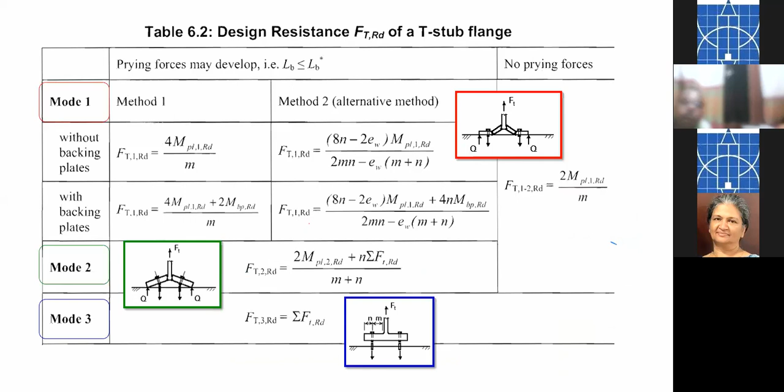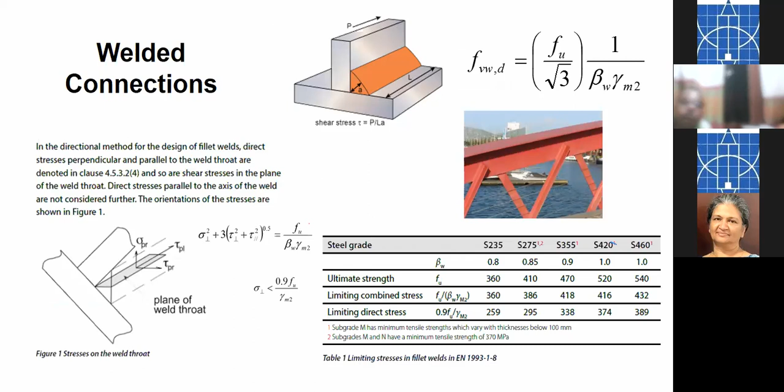Now, connection behavior is a little more complex than just working out the number of bolts or the length of the weld. If you take a fin plate or an end plate when you're connecting beams to columns, a fin plate is somewhat akin to a simple connection, taking a shear force and not being able to take much of a bending action.

It can fail in 6 different ways. It can fail with the bolts failing, it can fail with the weld, it can fail with the plate bending, and so on — 6 identifiable modes of failure.

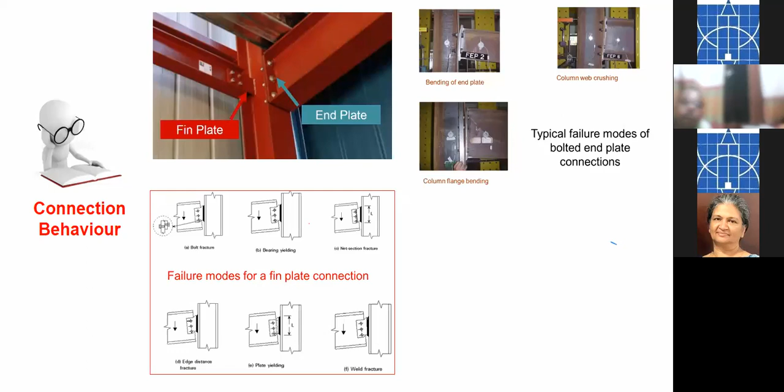And when you talk about end plates, again there's different ways it can fail. The end plate can bend. You can have the column web that can crush. You can have the column flange bending. And there are many others. In fact, there are 16 different ways an end-plated connection can fail.

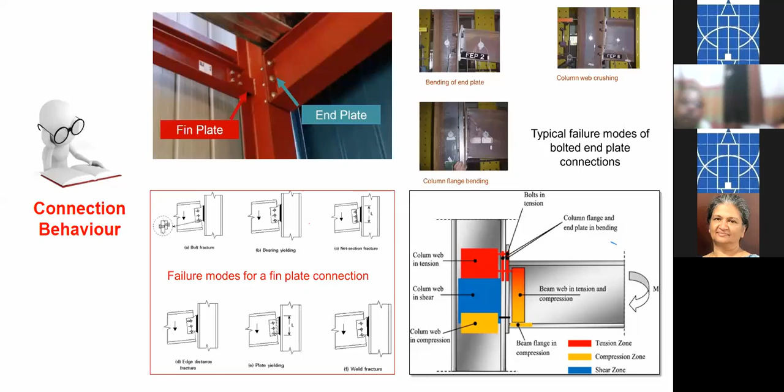So there is a tension zone, there is a compression zone, there is a shear zone, and each of those zones also has several components, so they can all fail in their own little way, and therefore this is a far more complex situation — you have to check it using 16 different checks.

But again, the code is very helpful here. There is a table separately. Of course, I have used the color code here, but say for local bending of the column flange, you have a set of equations which gives you the design resistance. It gives you the stiffness coefficient. It gives you the rotational capacity.

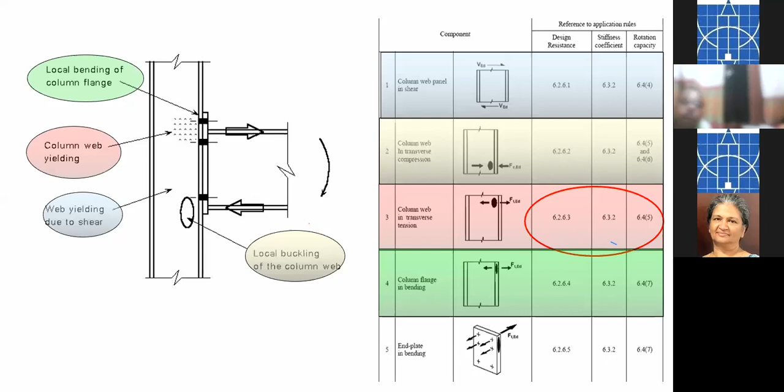So you can work out what the stiffness of this joint is, or what the strength of this joint is. So to go back and classify your joint, now you have the ammunition, you have the data given in this table. So then you might say, okay, is it safe to model the joint as a pinned joint when it's actually semi-rigid? Because what you do is you put the load and assume simply supported, and you have a bending moment diagram, parabolic distribution, whereas actually it's a moment like this.

Here you have a 0 bending moment, whereas here there is a bending moment, and that is also transferred to the column in a simple frame connection. When I say frame, it could be a braced frame situation. So there is anyway this situation where there can be a dangerous situation where the moment is transferred because of the rigidity or the semi-rigidity of that joint.

So EN 1993-1-8 does not deal with simple joints. There's nothing said about simple joints. Designers are advised to consult a separate document, a publication called ECCS Recommendations for the Design of Simple Joints in Structures. And there, what they say is that if the joint has sufficient rotational capacity — they explain how you work that out — and sufficient ductility, then you can design it as a simple joint. Otherwise, you should take the semi-rigid nature of the joint into account in your modeling and find out the actual forces and moments in the structure.

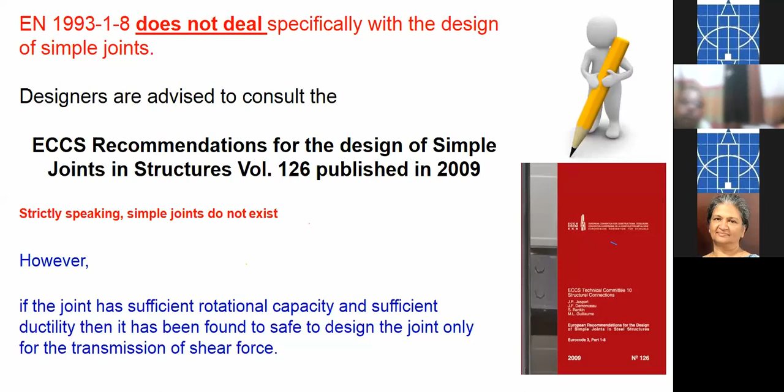So if I were to wrap this up, the documents needed to design a structure have increased. We need the core document to know the basis of design, and we need to know how to combine the actions. All of that is contained in EN 1990.

Then we need 1991 to assess the magnitudes of these design actions. Then we need the general action EN 1993-1-1 to determine the resistance of the steel members, and the resistance of the steel joints has to be got from EN 1993-1-8. In addition, you need your national annexes, and you might also need the NCCI, that is non-conflicting complementary information.

So the challenge is to find the appropriate document and the sections and clauses within it. The recommendations only appear once and they're not repeated. That is the challenge faced by structural designers.

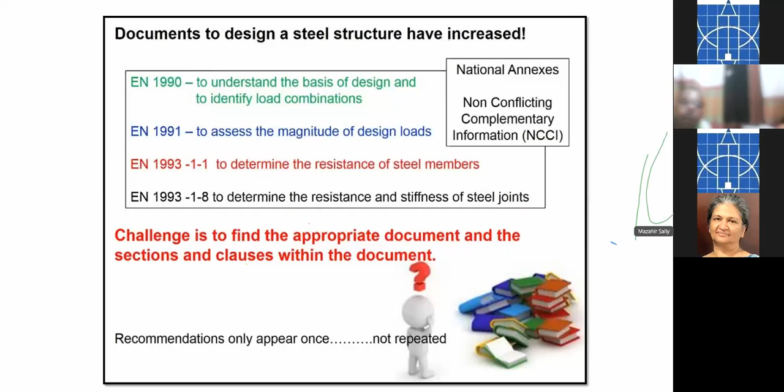So as a final observation, the Eurocode for steel provides a more rational and consistent approach to the design of steel structures, while maintaining the flexibility of nationally determined parameters.

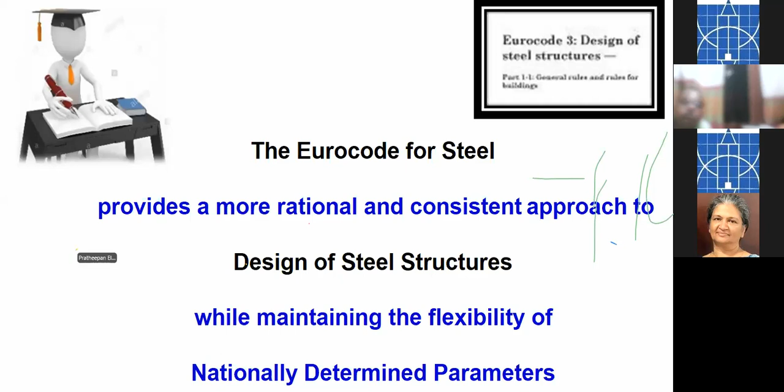Now I'm sure you must be waiting to ask me, okay, there is Brexit, what is Britain going to do now? It says, despite the introduction of structural Eurocodes in 2010, some structural civil engineers continue to use the withdrawn British standards. ICE explains the circumstances for how this may be acceptable, but they say that Eurocodes represent the future as regards safe and economic design and execution.

Now, this is something I extracted from the internet, I'm quoting it as it is. This was in 2017. It says withdrawn British standards are no longer reviewed by BSI, although they may remain competent in their approach for a time, subject to the points made below.

And it says it is apparent that the accredited engineering degrees all work to the Eurocodes, and graduates are schooled in the Eurocode approach. Hence, young engineers don't have any knowledge nor experience of the withdrawn British standards and codes. And that's true of Sri Lanka as well.

Our degrees are accredited and we teach Eurocodes. So there are no young engineers who have any experience or knowledge of the BS, apart from a passing reference when explaining the Eurocode, like I did today.

Then in addition, Britain via BSI is fully engaged in the current program of revising the Eurocodes. So as I see it, BS will stick to the Eurocodes, that's my belief. And also there's the ICE's code of conduct.

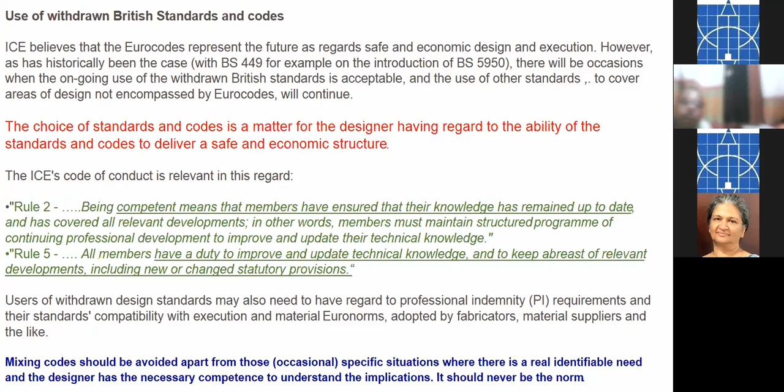And it says all members have a duty to improve and update technical knowledge and to keep abreast of relevant developments, including new or changed statutory provisions. So if you are to keep abreast, you have to be aware of what is happening in the later codes, and we have got to include those because that is current best practice. Now the BS codes are 10 years out of date.

So as opposed to talking of Brexit then and what of the future, there is this contribution that has been made by John Carpenter, who is an ICE structures expert panel member, and the British Standards Institute, as well as an ICE structures expert panel, have contributed to this. If I were to summarize that in 3 lines...

It says BSI is a member of the European Committee for Standardization, also known as CEN, and it's obliged to adopt the European norms and withdraw any conflicting standards. So wherever there is a European norm or European standard, Euronorm is French for the European standards, Britain has to withdraw their conflicting standards.

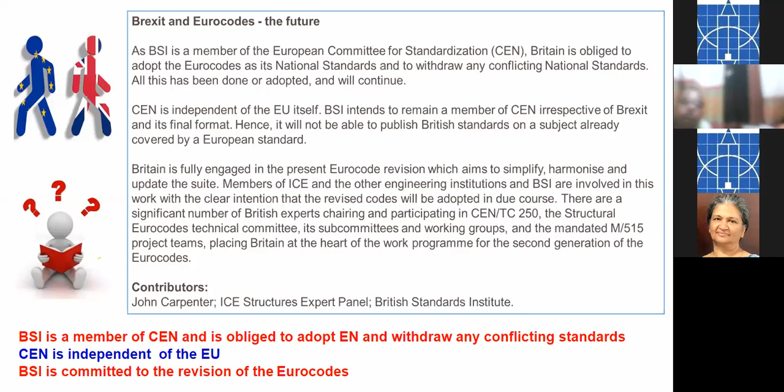The CEN is independent of the European Union. So although Britain is out of the European Union, the CEN is independent of that, of the EU, and therefore BSI remains as part of CEN. And BSI is committed to the revision of the Eurocodes as stated in that previous slide.

Except that we call it BSEN. And similarly, in this country too, we don't have BSEN, we say SLSEN. So we have SLSEN 1993.

Thank you very much, Madam. There's a few questions. One is after Brexit, Britain is no longer in the EU - is there any change? That's exactly what I answered just now.